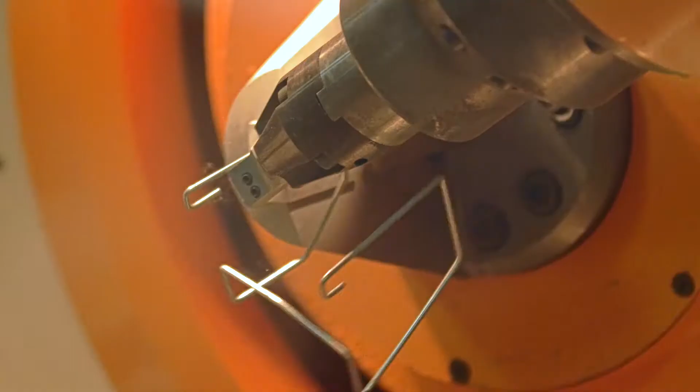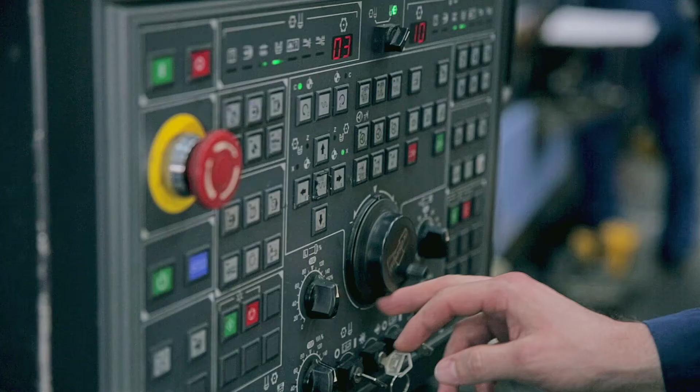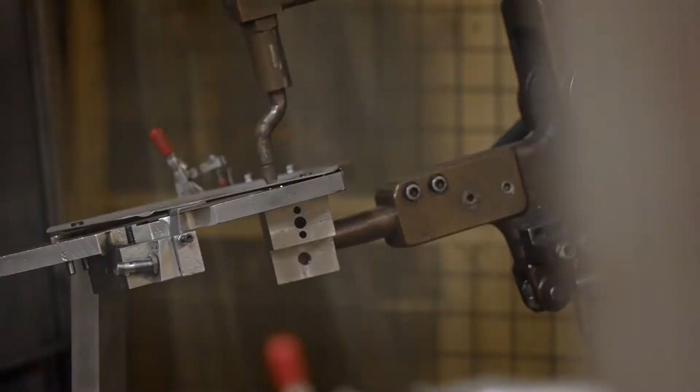For more than 75 years, the Precision Metal Forming Association and its members have subscribed to the very highest standards of excellence. PMA's annual Awards of Excellence competition recognizes innovative metal forming companies for outstanding performance in design, product development, process control, productivity, quality, and training and education. We honor them now, the 2019 Awards of Excellence in Metal Forming winners.

Our first award, the Zierick Manufacturing Corporation Productivity Award, is sponsored by Zierick Manufacturing Corporation, Mount Kisco, New York. It recognizes outstanding achievement in the development and implementation of programs and processes and the use of assets that lead to significant improvements in productivity.

The winner of the 2019 Zierick Manufacturing Corporation Productivity Award is Anchor Manufacturing Group, Cleveland, Ohio. The company won the award for productivity gains realized on its crash tube line, which manufactures 3 steering column crash tubes.

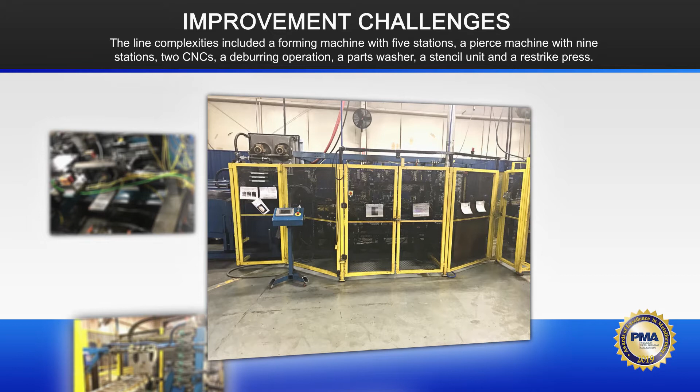Improving the crash tube line was challenging due to tight part tolerances and high throughput expectations. Also challenging was the complexity of the line, which includes a forming machine with 5 stations, a pierce machine with 9 stations, 2 CNCs, a deburring operation, a parts washer, a stencil unit, and a restrike press.

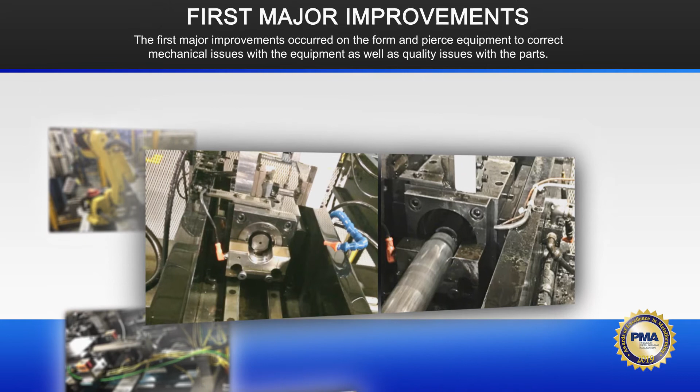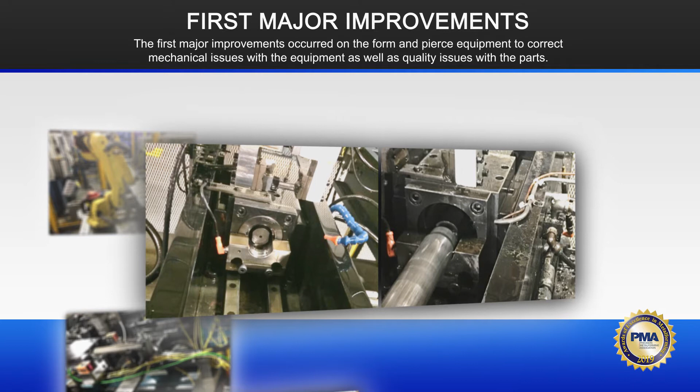The first major improvements occurred on the form and pierce equipment to correct mechanical issues with the equipment as well as quality issues with the parts. Investigation of a galling issue in the forming machine revealed oil sprayers getting bumped out of position and not spraying on the location of the tube required for effective lubrication.

This was corrected by hardlining the lube system. Anchor also worked with the lube supplier to perform analyses on the lube at different frequencies after a tank recharge. This helped determine when the system needed to be recharged and led to the addition of an appropriate preventive maintenance schedule.

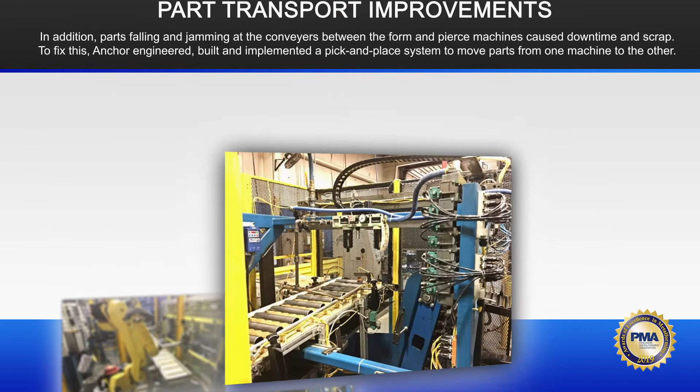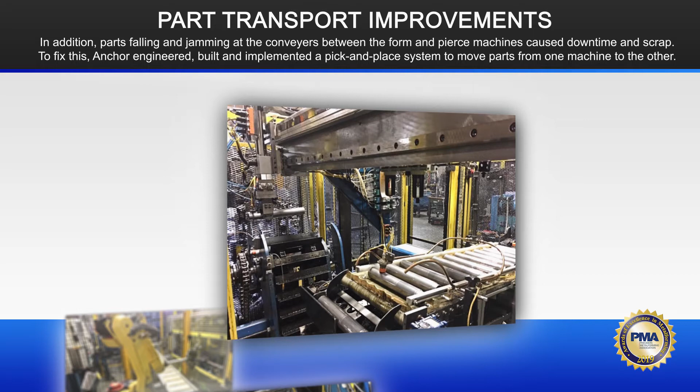In addition, parts falling and jamming at the conveyors between the form and pierce machines caused downtime and scrap. To fix this, Anchor engineered, built, and implemented a pick-and-place system to move parts from one machine to the other.

As for part quality, tubes exhibited slots out of location along the length of the tube as well as missing holes. Anchor corrected these issues through the implementation of LVDT sensors and inline cameras.

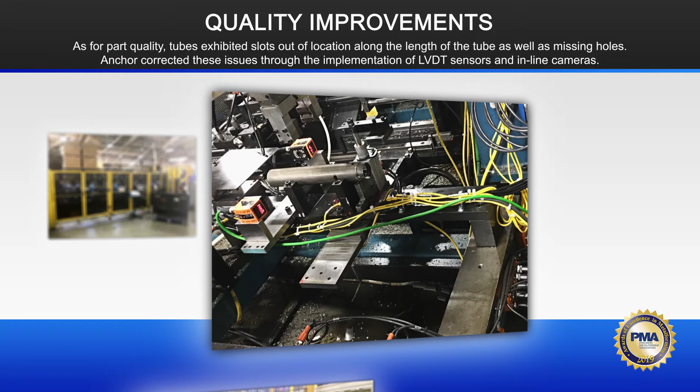Lastly, the 2 CNCs and the deburring operation required 3 total associates, 1 operator for each. In reviewing this, Anchor determined that too much time was spent on non-value-added activities, and the CNC machine cycle time needed to be decreased. Anchor then worked with the company to fully automate the CNC operations using a gantry pick-and-place system and 2 robots.

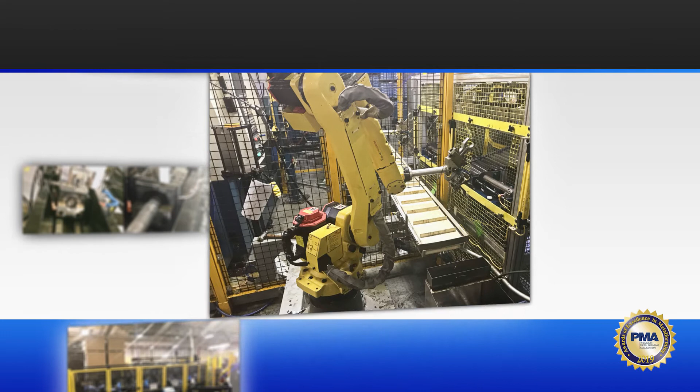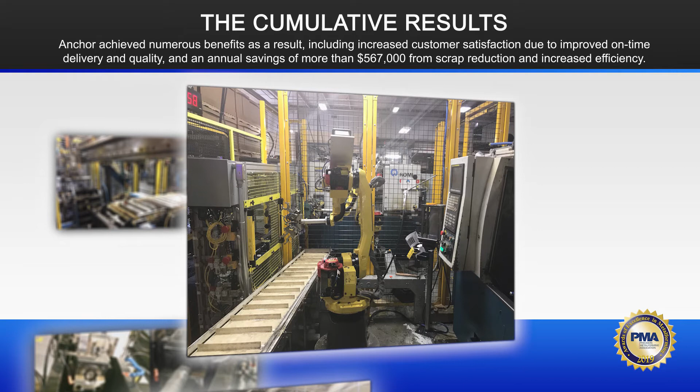Anchor achieved numerous benefits as a result of the productivity improvements, including increased customer satisfaction due to improved on-time delivery and quality, and an annual savings of more than $567,000 from scrap reduction and increased efficiency.

Anchor's average scrap rate between the 3 parts was reduced from 3.9 to 1.35%. Additionally, the company went from running 181 parts per hour with 5 associates to running 240 parts per hour with 2 associates.

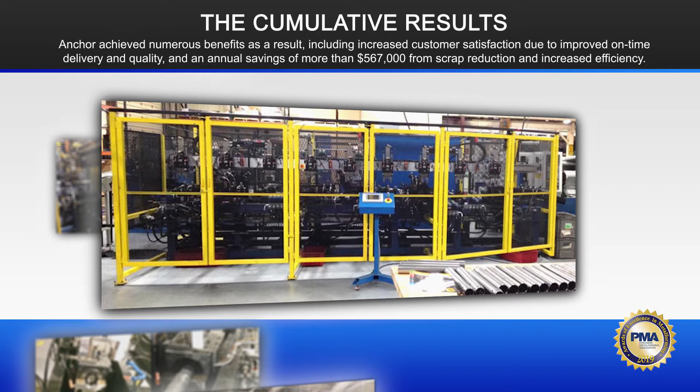Congratulations, Anchor Manufacturing Group, on your remarkable achievement.

The Pridgeon and Clay Excellence in Quality Award is sponsored by Pridgeon and Clay in Grand Rapids, Michigan. It awards a metal forming company for outstanding achievement in the development and implementation of a company-wide quality system that effectively uses continuous improvement. The winner of the 2019 Pridgeon and Clay Excellence in Quality Award is

HK Metalcraft, Lodi, New Jersey. HK Metalcraft is celebrating the 15th anniversary of its Quality Management Bonus Program. This company-wide bonus system rewards all employees if HK Metalcraft successfully ships with 0 defect customer returns during a month.

If successful during month 1, employees receive a $25 bonus. After 2 months in a row, employees receive $50. The pattern repeats in subsequent months, with $450 as the total bonus per employee for a perfect year. If a month is missed, the program starts over at $25.

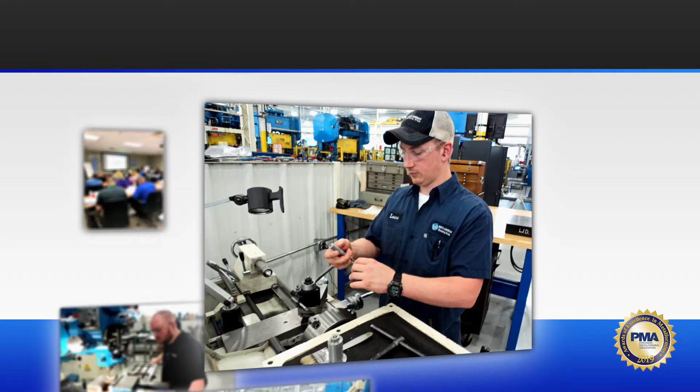By partnering with the U.S. Department of Labor and the National Institute for Metalworking Skills, NASG developed a comprehensive tool and die apprentice program that combines 2 years of in-house theory instruction with approximately 8,000 shop hours. At every step of the program, the student must prove competency before advancing.

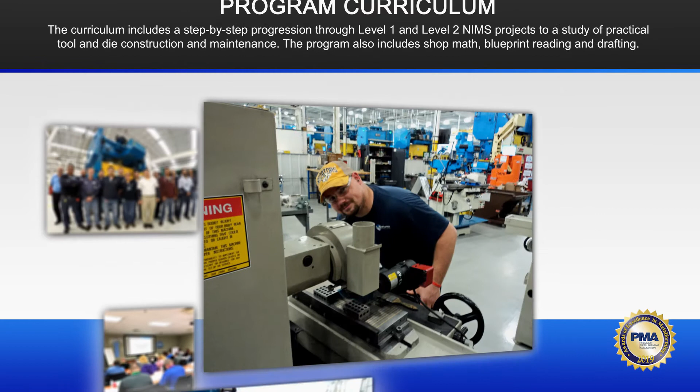As apprentices build time in the shop and complete required NIMS projects, their pay increases toward the journey worker rate. The curriculum includes a step-by-step progression through Level 1 and Level 2 NIMS projects to a study of practical tool and die construction and maintenance. The program also includes shop math, blueprint reading, and drafting.

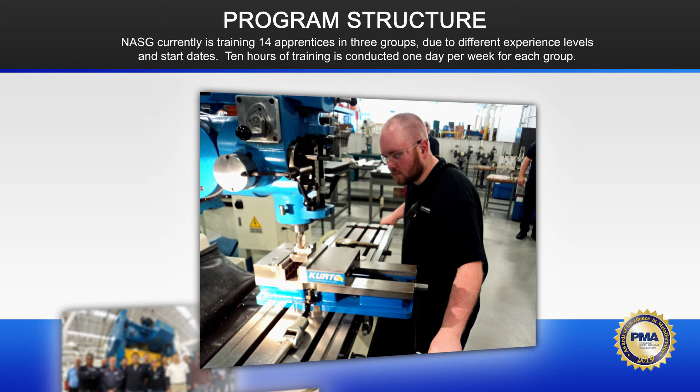NASG currently is training 14 apprentices in 3 groups due to different experience levels and start dates. 10 hours of training is conducted 1 day per week for each group. Classroom hours are not paid and therefore represent the student's commitment to the program. Apprentices work a minimum of 40 paid hours each week under the guidance of 2 full-time apprentice team leaders, and as they progress, they are paired with journey workers.

NASG also provides an outstanding operational excellence program with all leaders from shop floor supervisors to the president and CEO required to undergo a 1-week total quality production system for leadership workshop. The curriculum was developed in partnership with Toyota, Harvard School of Business, and key Tier 1 Toyota suppliers.

Since the program's inception in 2016, nearly 400 associates have been trained, with $6.06 million in tangible cost savings attained in 2018. The company is on track to exceed these savings in 2019.

Additionally, NASG trains team members in problem solving, basic equipment care, and 5S. Nearly 150 associates have been trained since the problem-solving workshop launched in August 2018. Approximately 400 associates have been trained in basic equipment care since April 2017, and 1,390 employees received 5S training since its inception in 2013.

Congratulations, North American Stamping Group, on your excellent work to train a skilled workforce.

The Clips and Clamps Industries Educational Institution Award is sponsored by Clips and Clamps Industries, Plymouth, Michigan. It recognizes a public or private educational institution that provides exemplary training and education services to companies in the metal forming industry. The winner of the 2019 Clips and Clamps Industries Educational Institution Award is State Technical College of Missouri, Linn, Missouri.

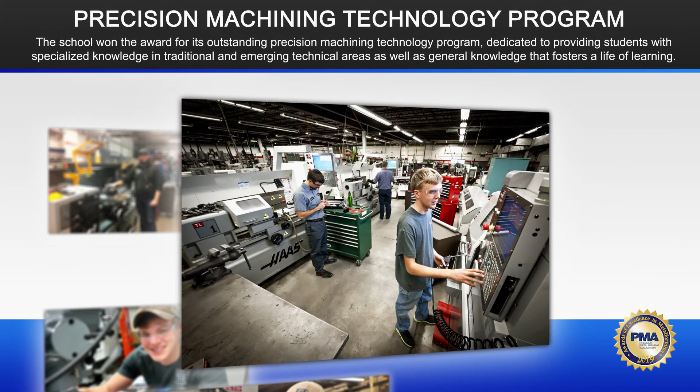The school won the award for its outstanding precision machining technology program, dedicated to providing students with specialized knowledge in traditional and emerging technical areas, as well as general knowledge that fosters a life of learning.

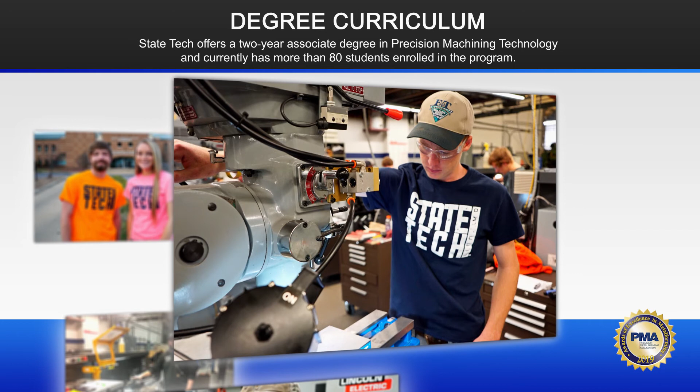State Tech offers a 2-year associate degree in precision machining technology and currently has more than 80 students enrolled in the program. The school's curriculum provides students with the practical experience, knowledge, and judgment to plan, prepare, and operate precision machines. Graduates understand 3D modeling, computerized post-processing, and CNC setup and operation.

Throughout the program, students complete increasingly complex lab projects to develop skills. Those who successfully complete their Level 1 projects receive National Institute for Metalworking Skills certification. With 20 Haas CNC machines, State Tech is an active member of the Haas Technical Education Center network.

Students are exposed to manual machining, CNC turning and multi-axis machining centers, computerized precision measurement, rapid prototyping, and water jet cutting. State Tech's program includes 20 hours of hands-on experience per week.

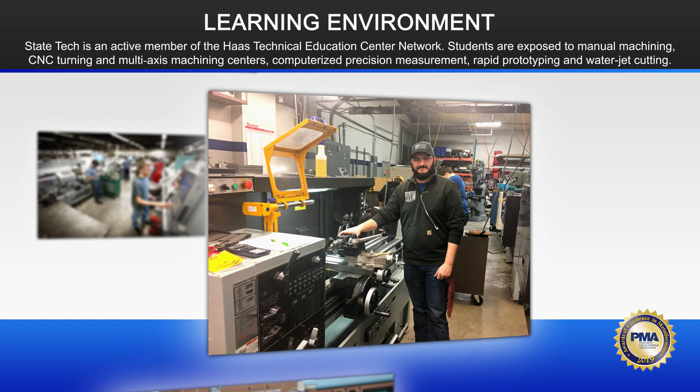Instructors have at least 15 years of experience, and all are graduates of the college's Precision Machining Technology program. State Tech also has a 99% job placement rate for students who complete the program, with graduates working for companies across the state of Missouri and throughout the Midwest.

Congratulations, State Technical College of Missouri. PMA applauds your efforts to prepare students for careers in manufacturing.

PMA also offers awards in the areas of design, process control, and product development. The Higgins-Kieffer Design Award is sponsored by the Quarterly Club, a group of CEOs from leading metal forming companies. The Link Systems Process Control Award is sponsored by Link Systems, Nashville, Tennessee. The Ulbrich Award for Competitive Excellence in Product Development is sponsored by Ulbrich Stainless Steels and Special Metals, North Haven, Connecticut.